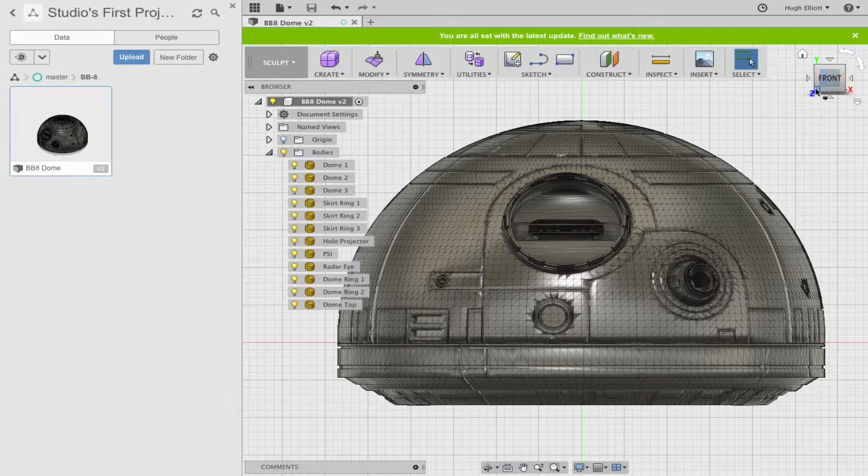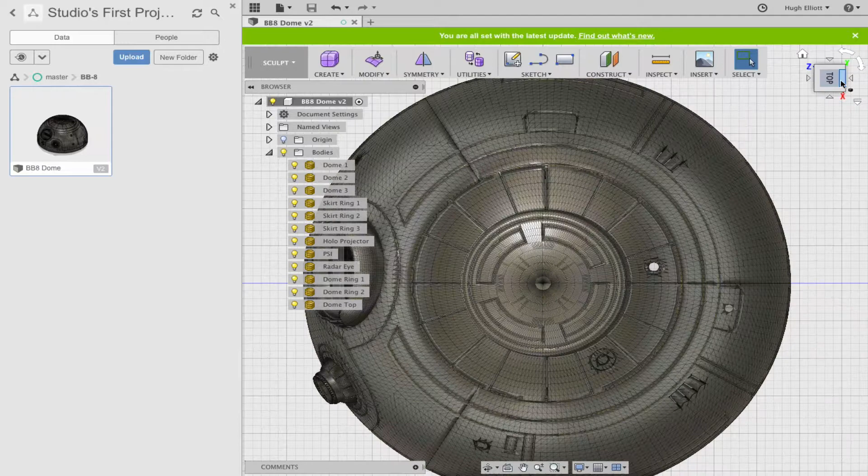I've been importing the BB-8 dome parts into Fusion 360, and there was a question about them loading in at the wrong size. Mine seem to be loading in okay. I did a quick measurement across and it seems to match what I've actually printed. So let's really quickly go over how I did it.

So, new design. You come down to this gear on the bottom right hand corner and select 'do not capture design history.' This will allow you to bring in meshes. Pick continue, then go to insert mesh.

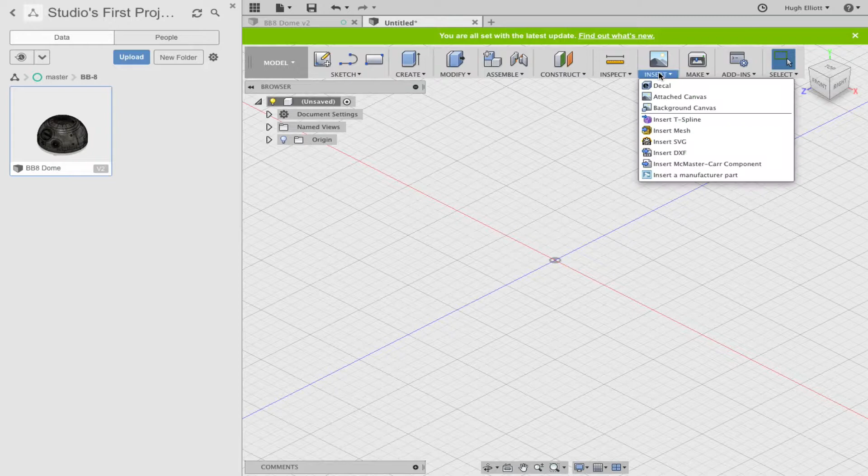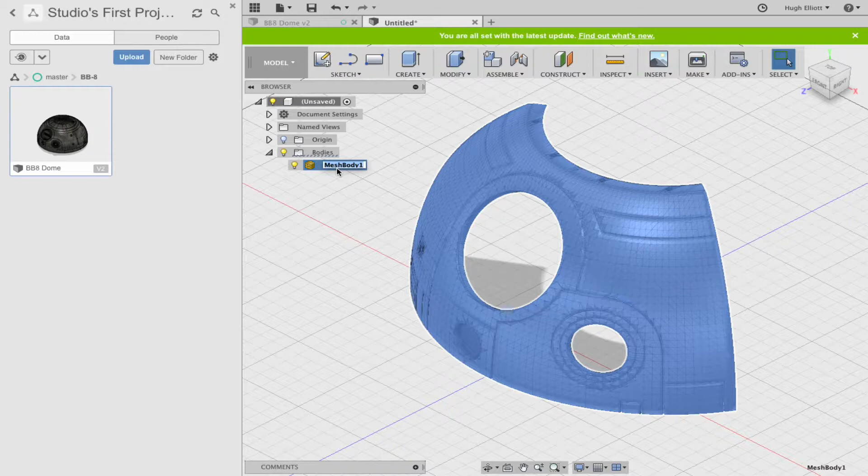Grab, I don't know, let's grab maybe dome panel 1. I'm looking at the top, so I'm going to flip it so it's facing the right direction for me. I'll say OK. And here it is loaded in as a mesh. I'll call it dome panel 1.

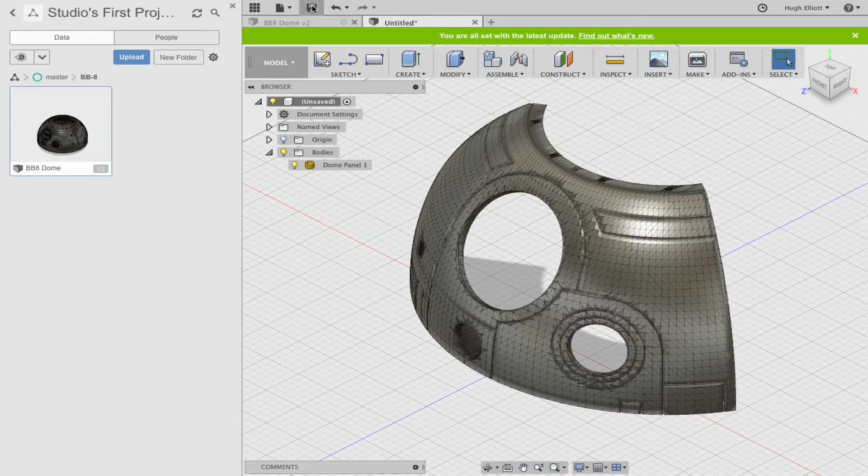I'd have to go measure, but if I measure this spot to this spot, you can see it's 75.6 millimeters. Not crazy, I think it's about the right size. And that's it - that's how I've done this entire thing, essentially saying insert mesh and then position it so it's in the spot.

The point is that I can now turn off my dome parts and get an idea of my available space.